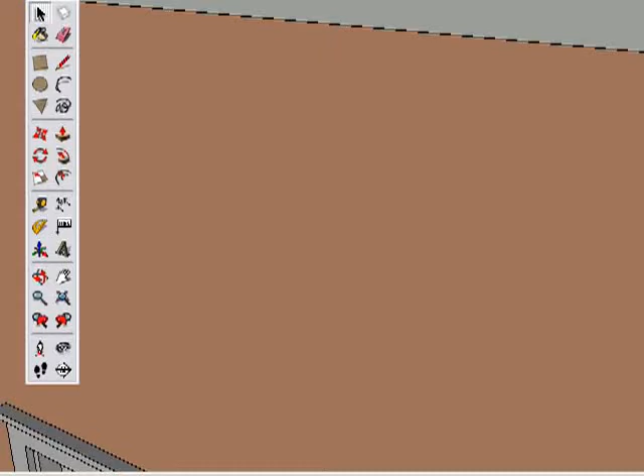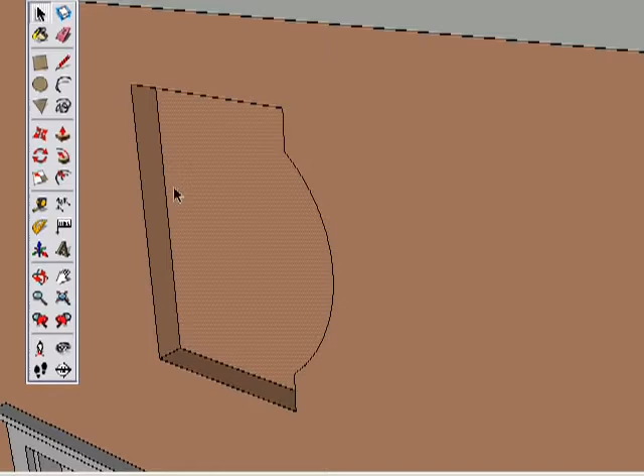Think back to the last video. The big idea behind SketchUp is that you draw shapes and pull them into 3D, right? So this video will focus on the ins and outs of drawing shapes. Everything you can create in SketchUp is either an edge or a surface, and usually an interesting combination of both.

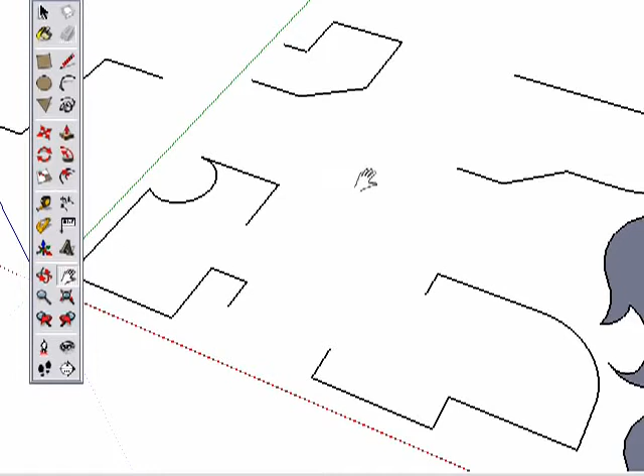Edges can exist on their own, however surfaces cannot. Every surface in SketchUp has a set of bounding edges. Erase one of those edges and the surface will be gone. This is true no matter how simple or complex your surface is. However, you can easily recreate a surface by drawing in the last edge. This is referred to as healing a surface.

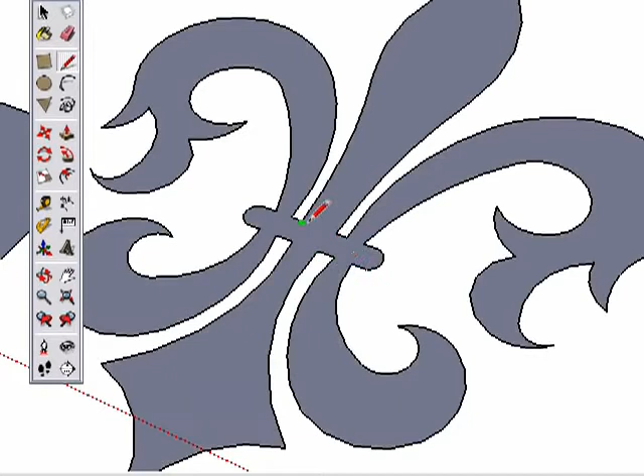We can easily create or heal these surfaces by drawing the final edges. We can do this on simple shapes or draw the edges needed to heal even more complex shapes. As simple as creating shapes is, there are still some guidelines you must follow to assure your success with SketchUp.

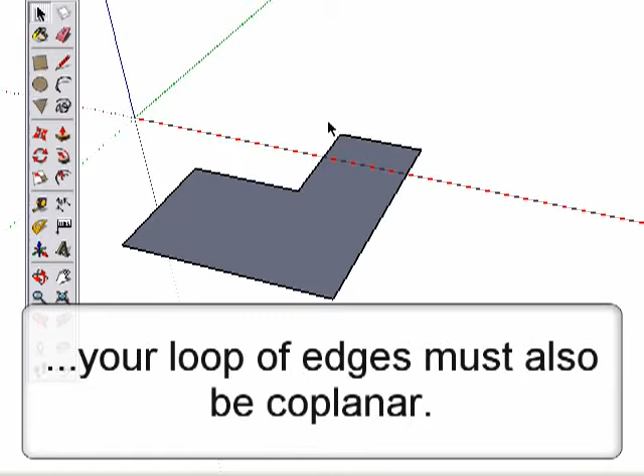So here they are, the 4 rules for drawing edges. The first rule you already know about. When drawing edges, you must draw a full closed loop of edges to create a surface. However, this closed loop of edges must also be coplanar. What does that mean? Well, take a look at these 2 examples.

Drawing the edge here completes the surface. However, drawing this edge doesn't complete a surface. We can see what the problem is by orbiting. Now we can see this line drops down. It isn't in the same plane as the other edges.

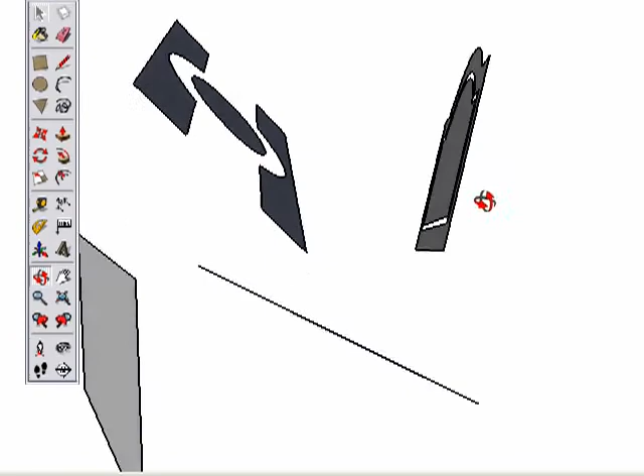Any closed loop of edges must be coplanar, or all in the same plane, to create a surface. You can see in these examples that a surface can be created in any orientation, as long as all the edges remain coplanar. This is Rule 1 for drawing edges.

Rule 2 for drawing edges relates to Rule 1. To help you draw edges that are coplanar, there is this red, green, and blue axis built in SketchUp. You've probably noticed already that when drawing edges, they will snap to become aligned with an axis, and become red, green, or blue in color to indicate that direction.

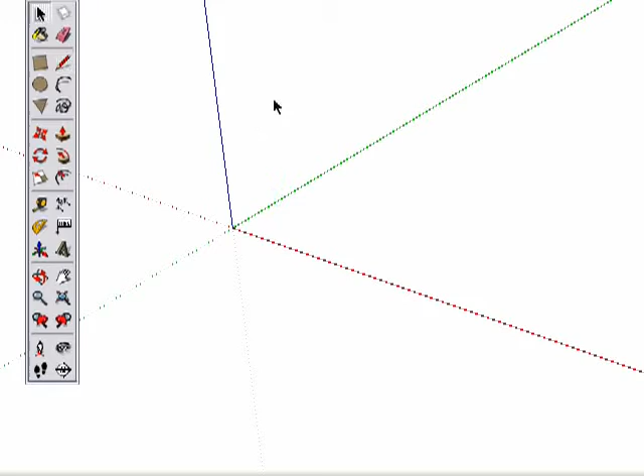The key to successfully using the axis directions is called inferring. For example, say we want to draw in the final 2 edges of this shape. Start drawing an edge, but we don't know how far to draw this edge, so it will line up perfectly with the above edge. Inferring is the ability to ask SketchUp to line it up for you.

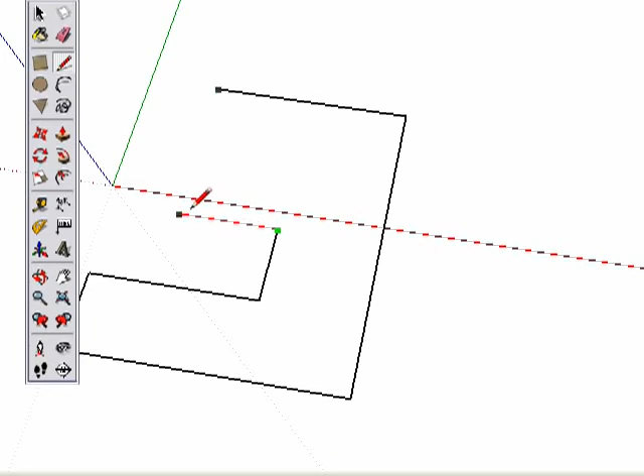Simply hover for 2 seconds on the point you want to line up with, then move back to your original line and move slowly until SketchUp shows you a dotted line, inferring to the point above. Now you can draw the edges with confidence that they line up perfectly.

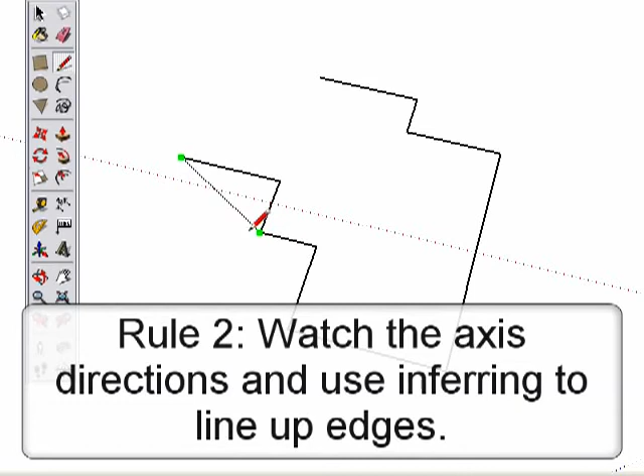Inferring is the second rule of drawing edges. Make sure to practice and understand inferring, and be patient as you do. Take your time and hover for a full 2 seconds over the point you are interested in, and more importantly, make sure you see the edge color and dotted inference line when creating edges. It may seem a simple thing, but it causes plenty of trouble later in your model if you aren't very careful about watching your inferences.

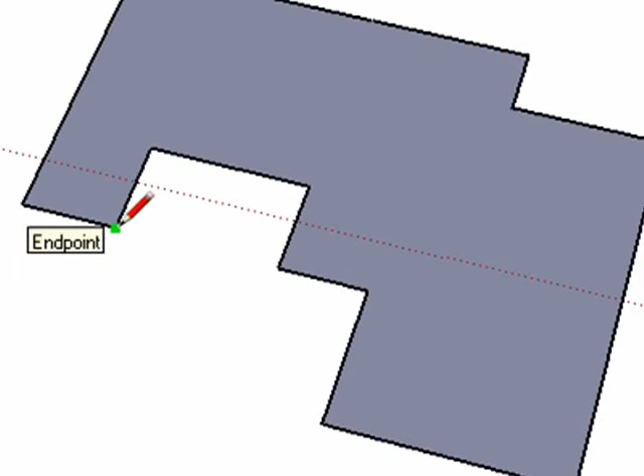Rule 3 for drawing edges should seem familiar. It deals with inference points that we've already been using. Every time we draw a point from or to the end of an edge, we see a green dot indicating it is an endpoint. SketchUp snaps to these points to help you draw accurately and quickly.

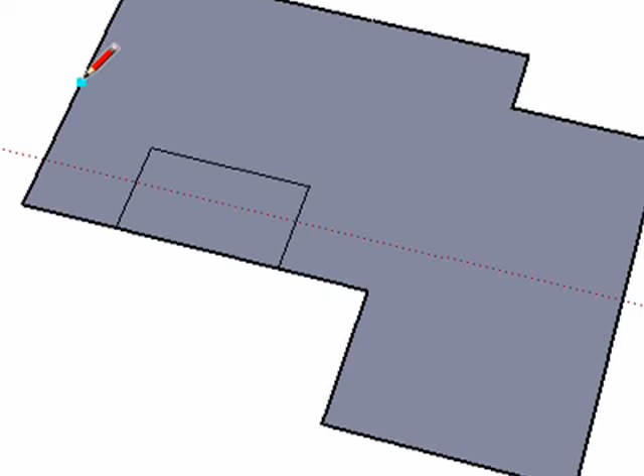Review the different types of inference points. Endpoints are shown with green dots. The middle of an edge is shown with a cyan dot. Anywhere else on an edge is shown with a red dot. Where 2 edges cross is shown by a black dot. Rule 3 for drawing edges is to use these inference points. Watch them closely to make sure you are drawing correctly as needed.

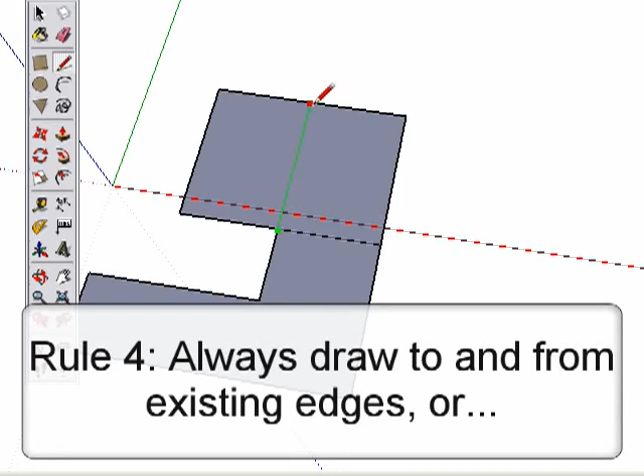Now that you know about Rule 3 and inference points, Rule 4 will be easy. When drawing shapes in SketchUp, always draw to and from edges. Another way to put it is don't draw edges across another edge. A few examples should help to explain this.

Say you wanted to draw a rectangle divided equally into 4 parts, like this. Most of us would follow these steps. Draw a rectangle, then draw a line from the midpoint to midpoint in one direction. So far, so good. Then draw another line from midpoint to midpoint in the other direction.

But this doesn't work. It crosses over an edge, and in fact, if we examine the shape, it isn't properly divided. Think of the rule. We were okay up to this point. And instead of crossing the edge, draw from this midpoint to the midpoint of this edge. Then draw the final line from midpoint to midpoint. By following this rule to draw only from and to edges, it creates the 4 equal shapes we need.

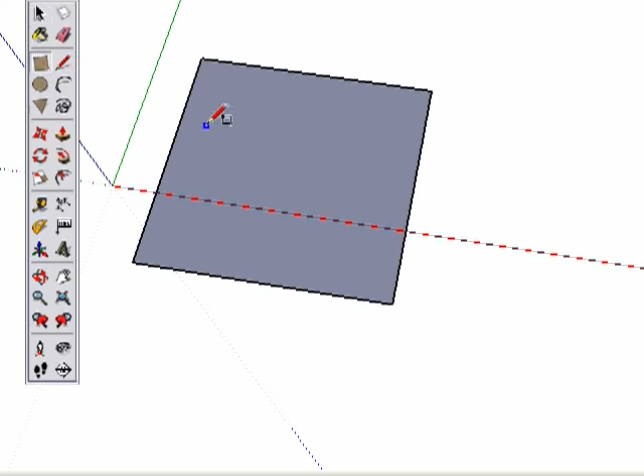This is true of any drawing tool you are using. Don't cross any edge over another edge, whether it be with the rectangle, circle, arc, or any other drawing tool. So that's it, the 4 rules for drawing edges.

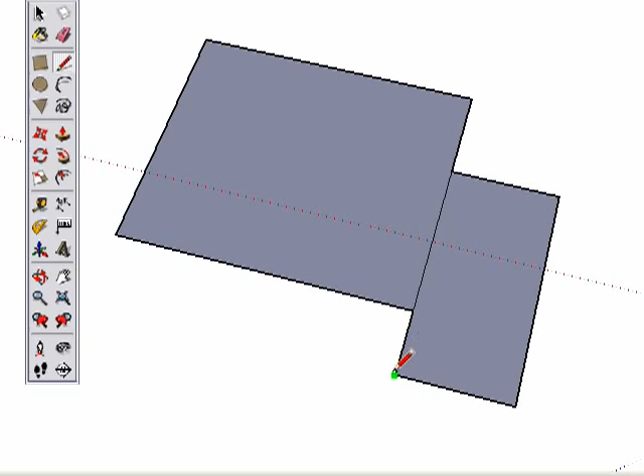Draw coplanar edges in a closed loop to create a surface. Use inferring and the red, green, and blue axis to help you draw accurately. Watch your inference points and draw from and to edges. As you become more familiar with SketchUp, you'll learn when you can bend these rules, but for starting out, follow them very closely.

Now that you know some guidelines for creating shapes, move to the next video to learn about pulling those shapes into 3D.